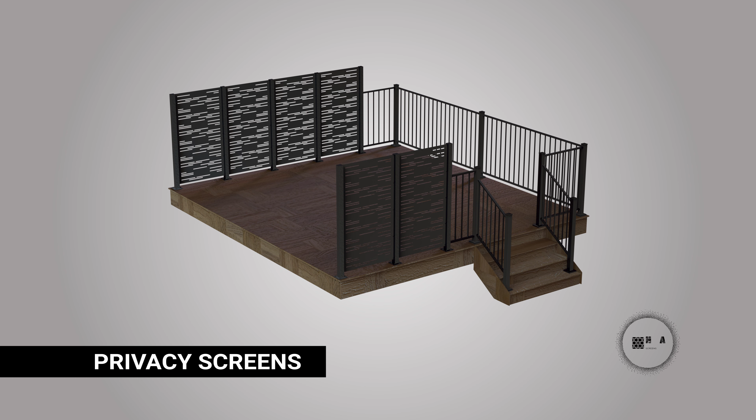In this video, we will show you how to install the screen onto your deck.

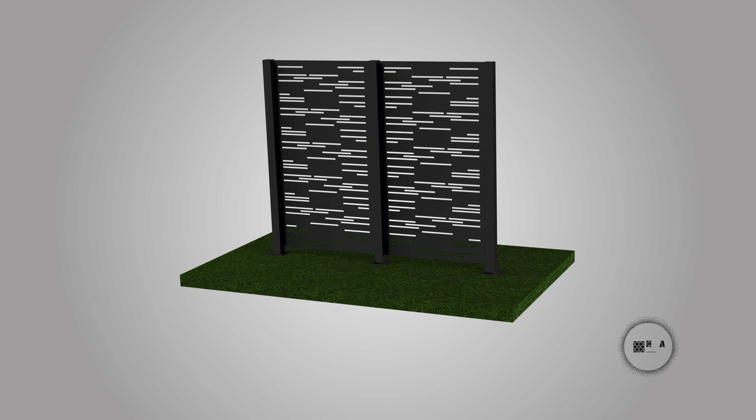Hideaway screens can be installed on a variety of surfaces including wood, concrete, grass, or dirt. Before you begin assembly, please make sure to read the assembly manual thoroughly as it contains important safety warnings and assembly tips. Start the assembly by checking the parts list.

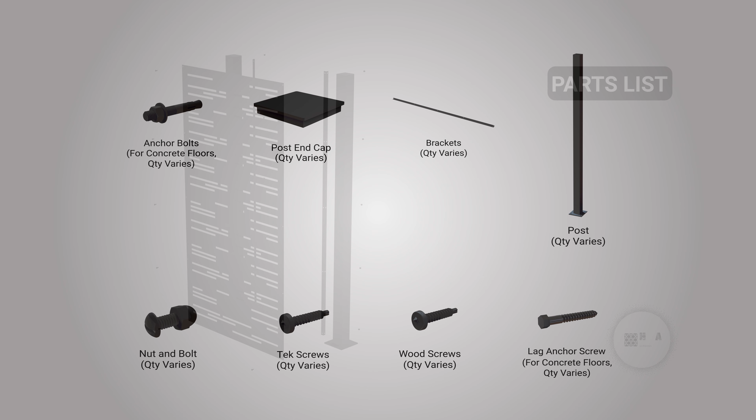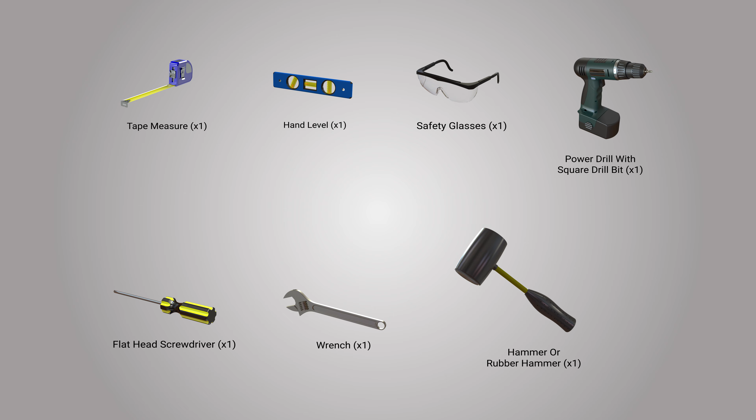Verify that the following parts are included with your assembly. The included parts are all of the mounting hardware, post, cap, and screens. The following tools are recommended for this installation.

Hideaway privacy screens come in 4 unique profiles and are available in both black and white. There are 2 options to installing the screens. One option is if you choose to install the screens onto the brackets, and the second option is if you wish to install the screens straight to the post.

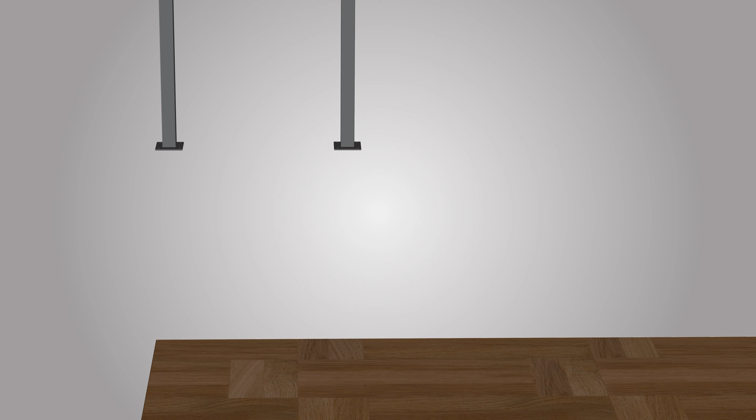We will first show you option 1. Begin the installation by choosing the location on your deck you wish to install the screens. Next, place 2 posts 3 feet apart, measuring from inside the posts.

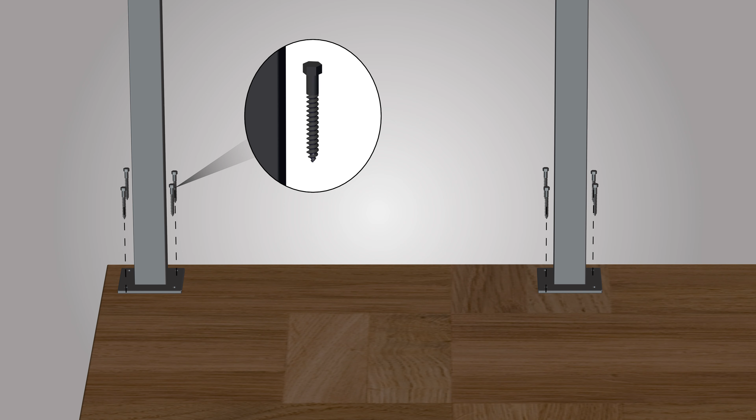Once the posts have been measured and placed accordingly, secure each post using 4 structural lag screws for each post as shown. For more details on lag screws, please see our specification guide at www.hideawayscreens.ca. Tighten the lag bolts as required.

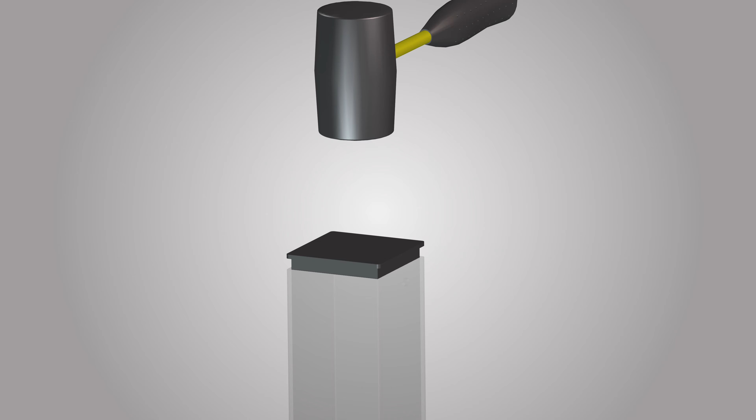Next, locate the top of the post and place the post caps on top. Attaching the post caps are easy. Insert the cap inside the post and push into place. You may need to tap them on with your palm, or a mallet. Repeat this step and ensure that both caps are securely attached. Use a hand level, and ensure both posts remain level.

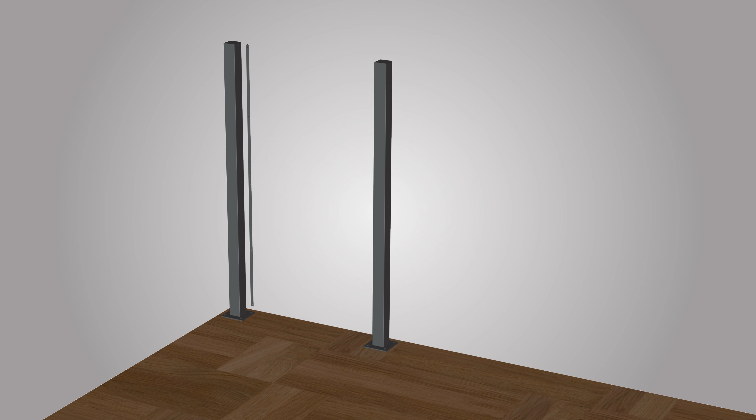After securing both post caps, proceed by attaching the brackets. Mount the brackets onto the inner section of each post at your desired height and location. Secure the bracket to the post using 5 self-drilling screws. Only use the wood screws provided if you are mounting your Hideaway screens to a wooden post.

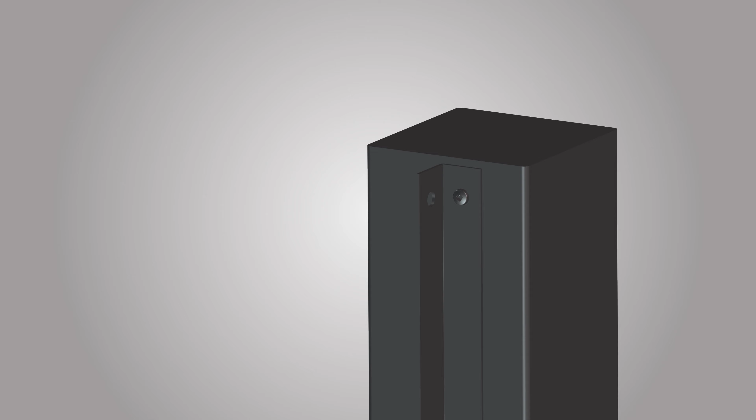Fasten the screws using a drill. Take care not to over-tighten the screws. Repeat these steps for the remaining 4 screws, and repeat these steps for the opposite side.

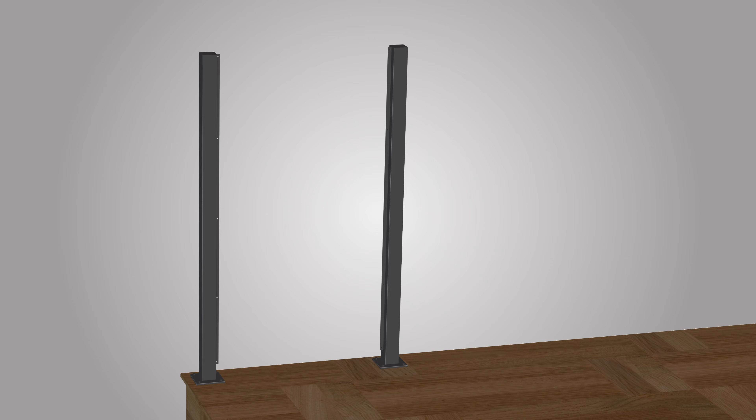Finally, locate the screen you wish to install and match the holes on the bracket. Push the screen toward the brackets, hold in place, and secure the screen using a total of 10 bolts and nuts.

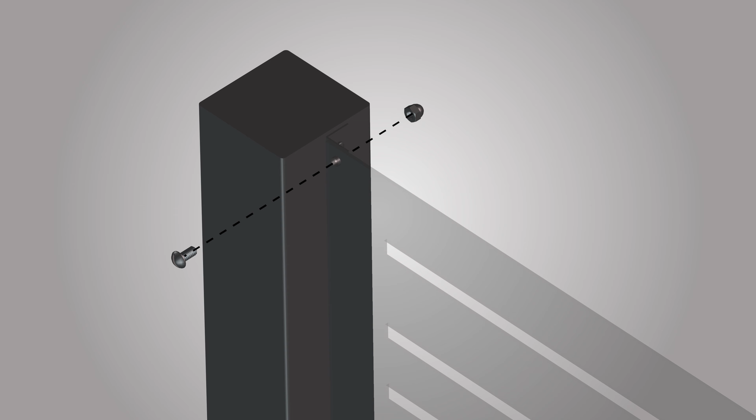Insert the bolts through the screen and the bracket. Tighten the bolt using a screwdriver and a wrench. Repeat these steps and tighten the remaining screws.

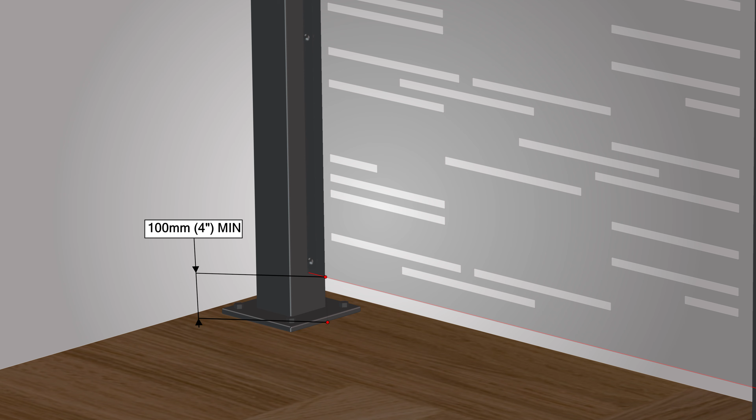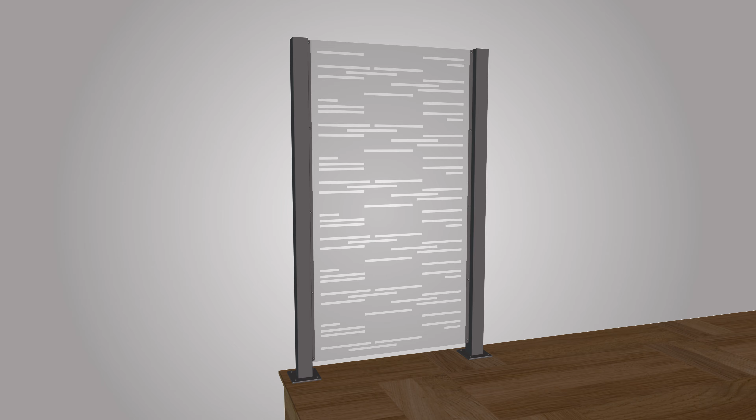Verify that there is a minimum gap of 100 mm, or 4 inches, between the bottom of the screen and the mounting surface. Repeat these steps for the opposite side. After the screen has been tightly secured, repeat these steps and place as many posts and screens as needed.

Congratulations, you have completed the installation of the privacy screen. If you decided not to attach the screens to the brackets and instead attach the screen to the post, then you may continue to option 2. Option 2, attaching the screens to the post without using brackets.

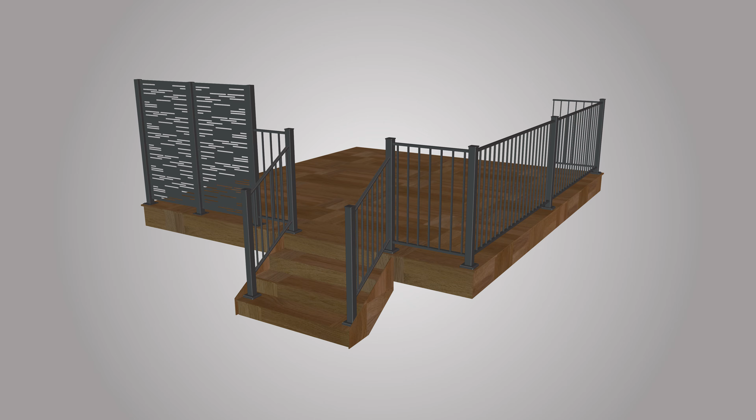Begin the installation by choosing the location on your deck you wish to install the screens. Depending on the location that you mount your posts, the distance will be determined by where you wish to mount your screens on the face of your post. You may choose to mount your screens on both the front end or the back side of your posts. You may also wish to combine install options 1 and 2 for the layout of your screens.

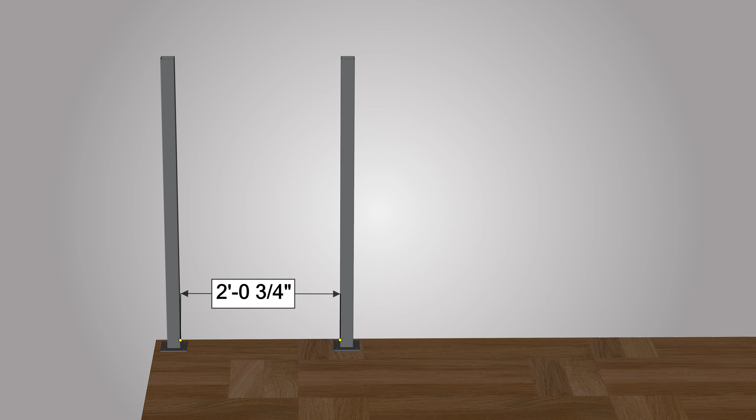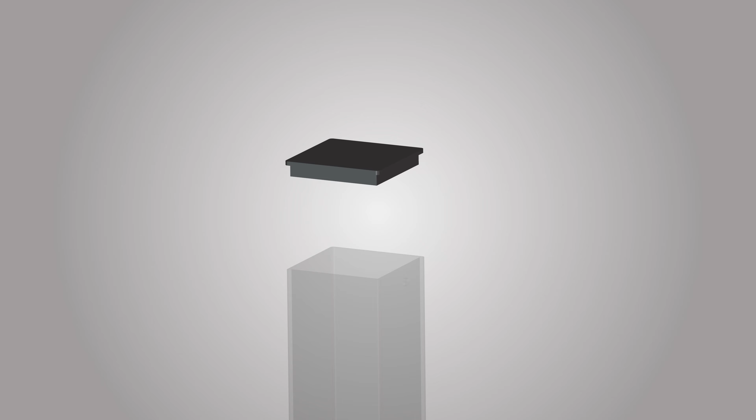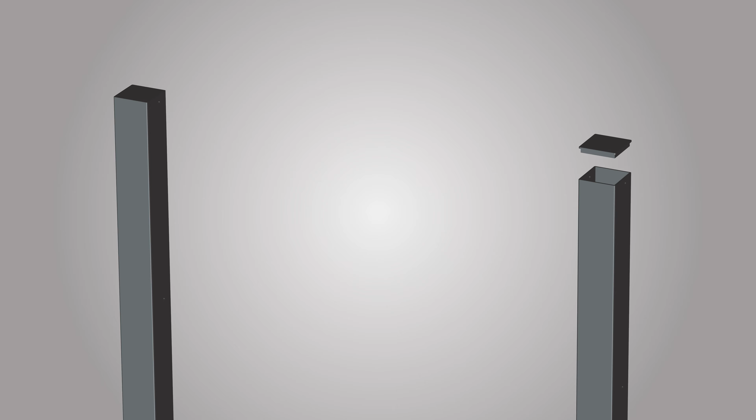Once you have determined where you wish to have your post mounted, do so by securing with 4 lag screws as shown. Tighten the lag screws as required. Next, locate the top of the post and place the post caps on top. Insert the cap over the post and push into place. Repeat this step and ensure that both caps are securely attached. Use a hand level, and ensure both posts remain level.

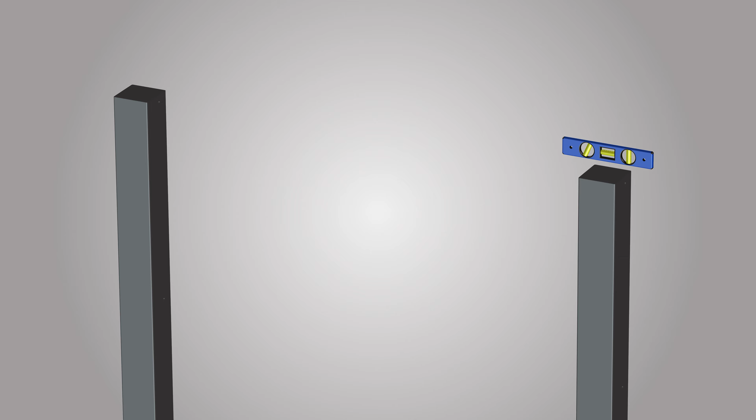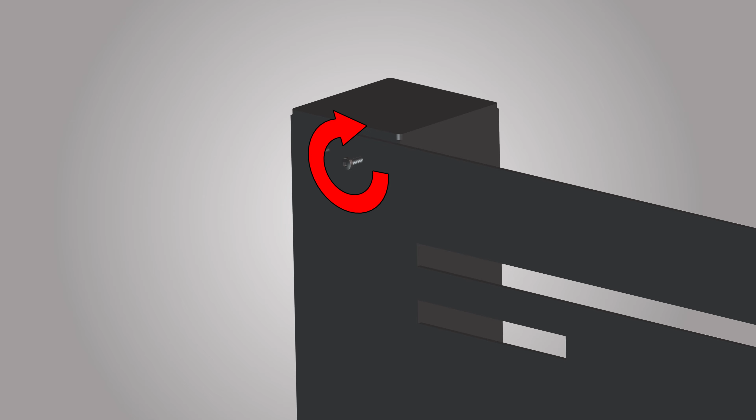Finally, place the screen in front of the post and push the screen towards the post. Secure the screen to the post by using 10 self-drilling screws. Tighten the screw using a drill. Repeat these steps for the remaining screws.

Verify that there is a minimum gap of 100 mm, or 4 inches, between the bottom of the screen and the mounting surface. Repeat these steps for the opposite side. For additional privacy screens, simply repeat the process for each additional screen you wish to install. Congratulations, you have completed the installation of the privacy screen.